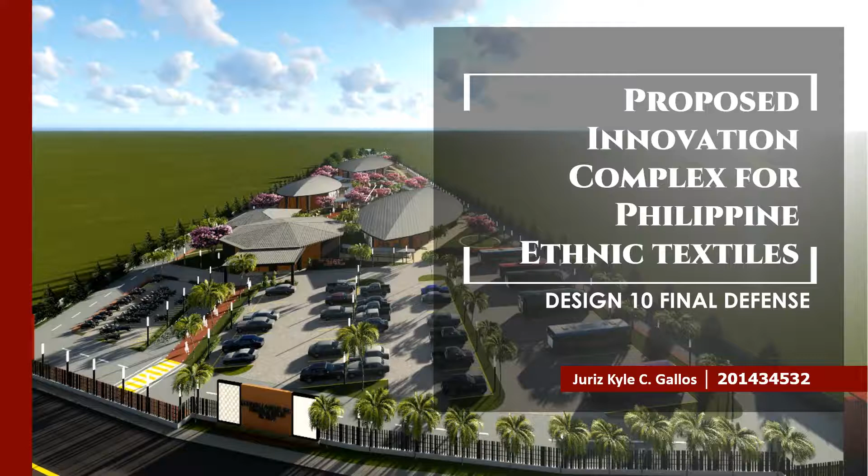Good day. I am Juriz Gallos, and today I will be discussing my thesis proposal entitled Proposed Innovation Complex for Philippine Ethnic Textiles.

Now, let's have a recap of what we have discussed in the previous presentations. At the beginning of the presentation, we discussed the significance of ethnic textiles and other relative information about it.

We also discussed the problems, issues, and concerns that the ethnic textile industry is facing. Upon gathering information and analyzing the situation, it was realized that three ethnic textiles from three different tribes are suitable to be part of the project proposal: the T'nalak from the T'boli tribe, Tabih from the Blaan tribe, and Inabal from the Bagobos.

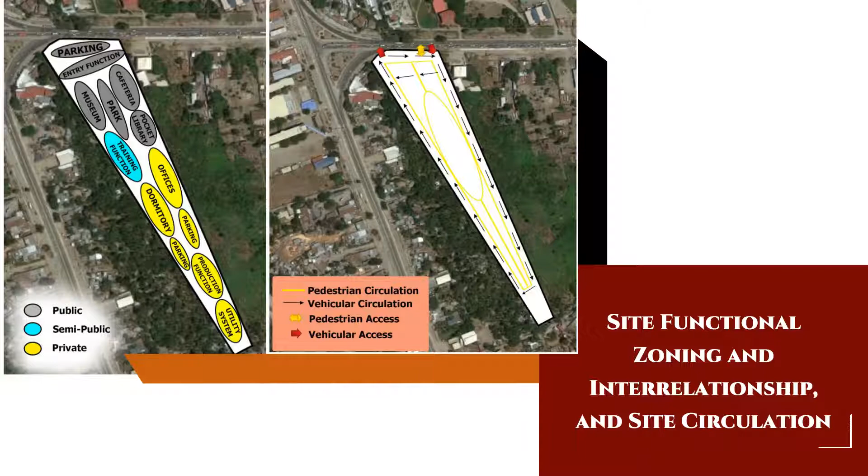Here in the slide, we can see the revised site functional zoning, interrelationship, and revised site circulation.

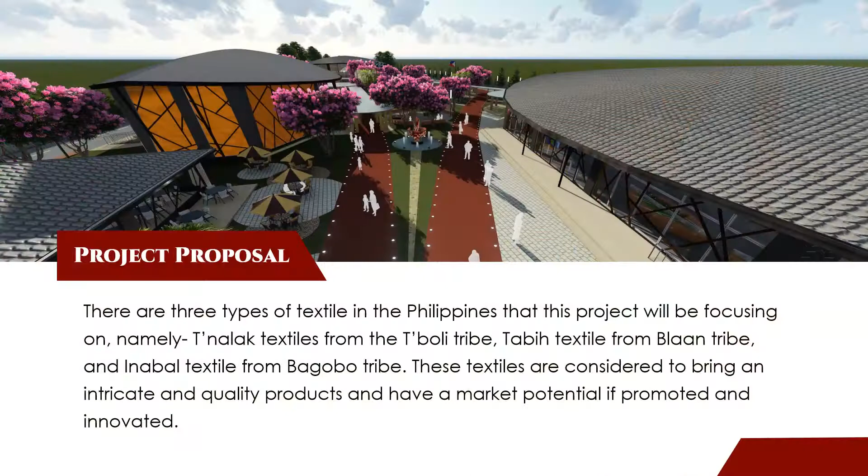Now we will move on to Chapter 5 of the thesis, which is the architectural design translation. In this phase of study, we will be converting all of the data and analysis that we have gathered from the research into architectural translation.

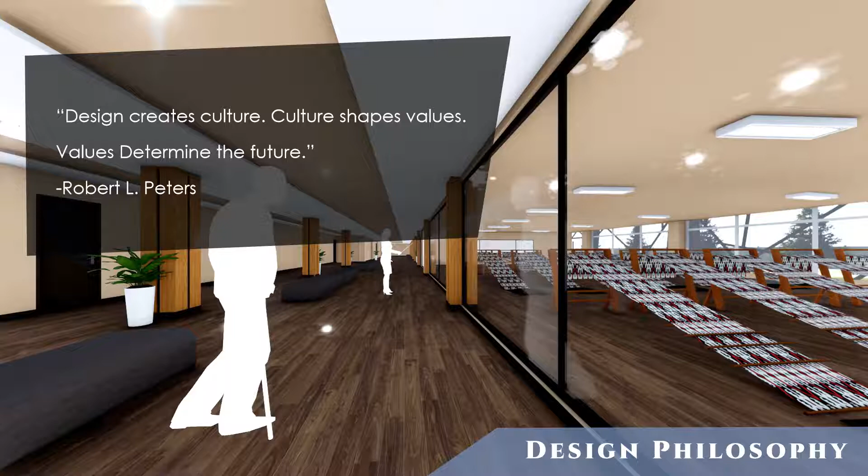And here's the design philosophy for this project. It is a quote by Robert L. Peters, which states that design creates culture, culture shapes values, values determine future.

The landscaping appearance complements the concept of a leaf. The landscaping is also functionally maximized by being useful as multi-purpose spaces such as park, plaza, picnic area, social areas, and more. The pathways are also designed to utilize pedestrian circulation in the most convenient way possible.

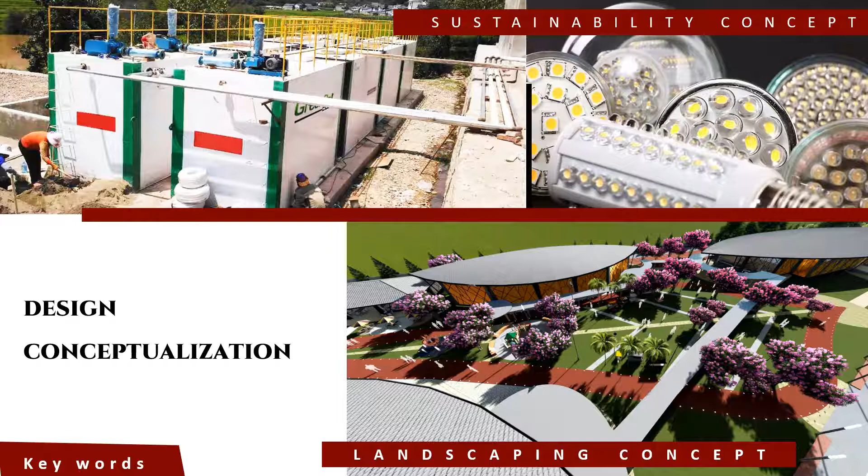Apart from this, materials and scheme to be used in the innovation complex will be earth colors and earth texture to emphasize the theme of indigeneity in the building.

Moreover, since the textiles are made with abaca fibers, which is potentially long-lasting, the textiles will be set as wallpaper in some of the accent walls in the building in order to introduce the ethnic textiles to every person who will be in that place.

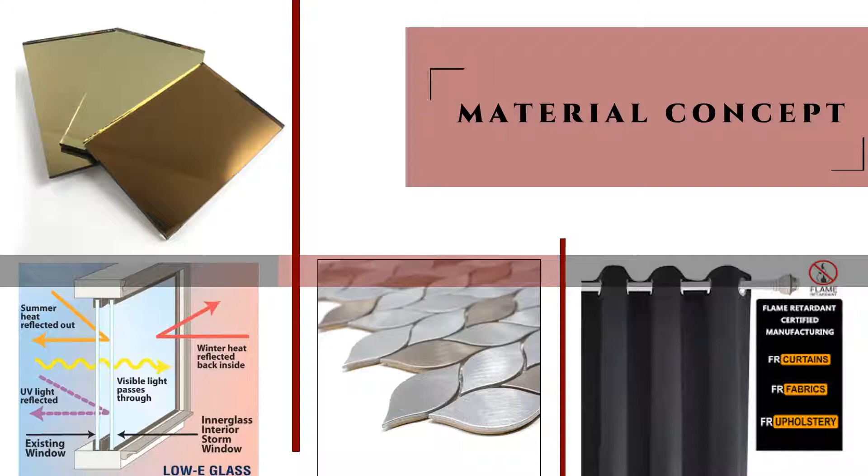Second is to bring spaces that will boost the tourism of this place. Third is to create a plan that will consider the architectural articulation of spaces that will bring convenience to its users. Fourth is to design buildings that will have a unifying and harmonious relationship and concept and will represent the advocacy of the project.

Fifth is to design an innovation complex that will serve its purpose and will answer the needs of its users.

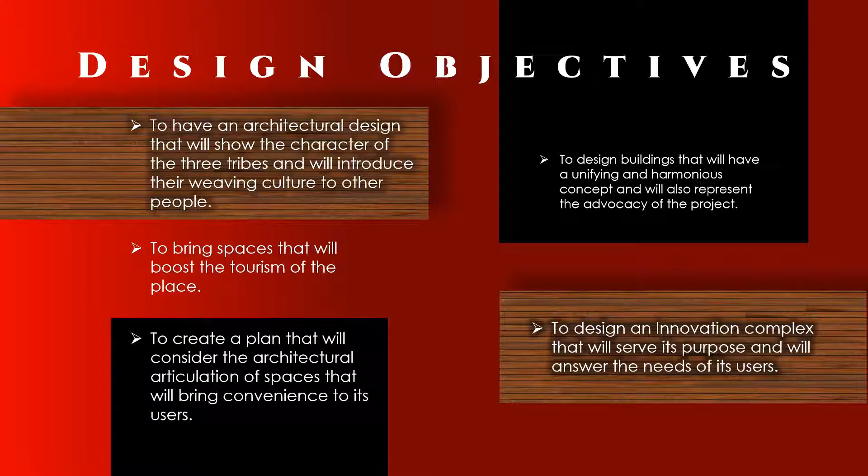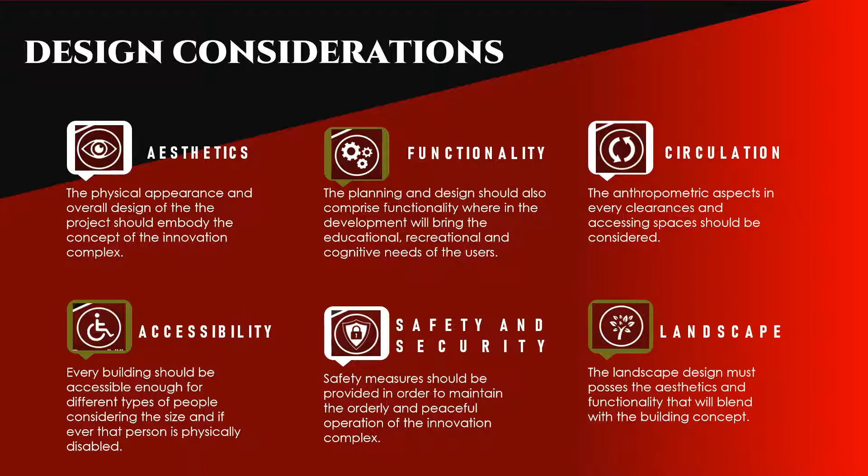The designation of buildings and spaces refer to the circulation of flow and behavioral analysis of every user.

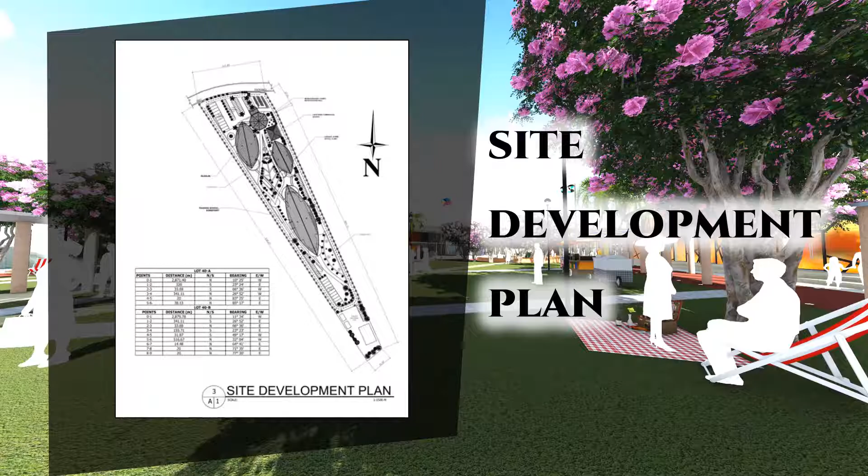Here are the perspectives of the site development plan. On the upper right of the slide, you can see the park, which also serves as a big opening and the biggest open space in the whole site.

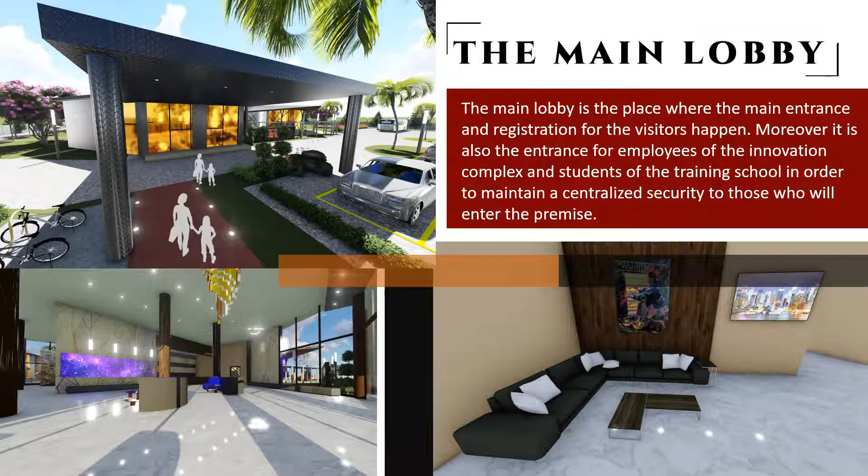Next, we will move on to the first building you will encounter when you enter the innovation complex, the main lobby. The main lobby is the place where the main entrance and registration for visitors happen. Moreover, it is also the entrance for employees of Innovation Complex and students of the training school in order to maintain centralized security to those who will enter the premise.

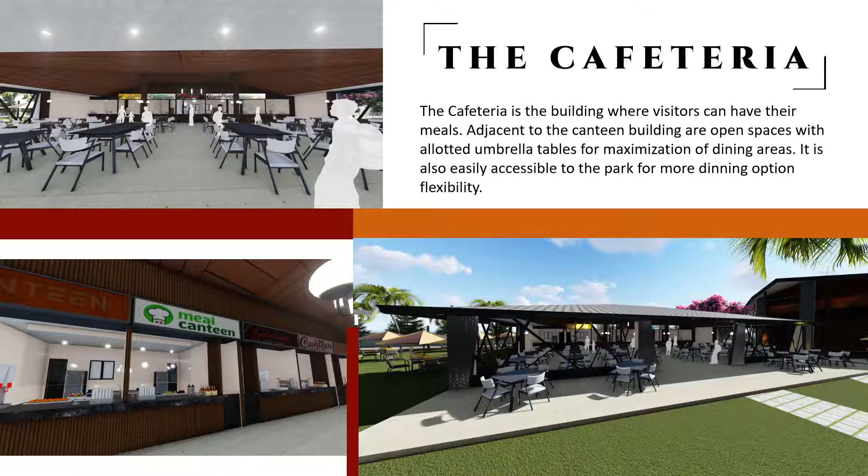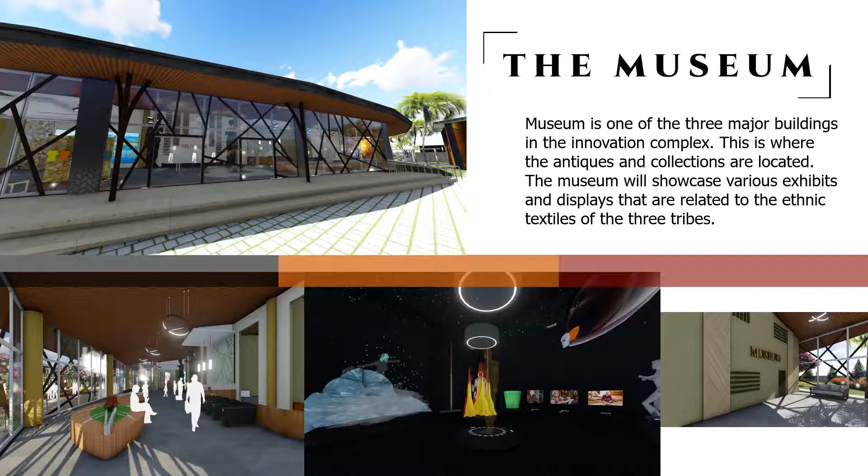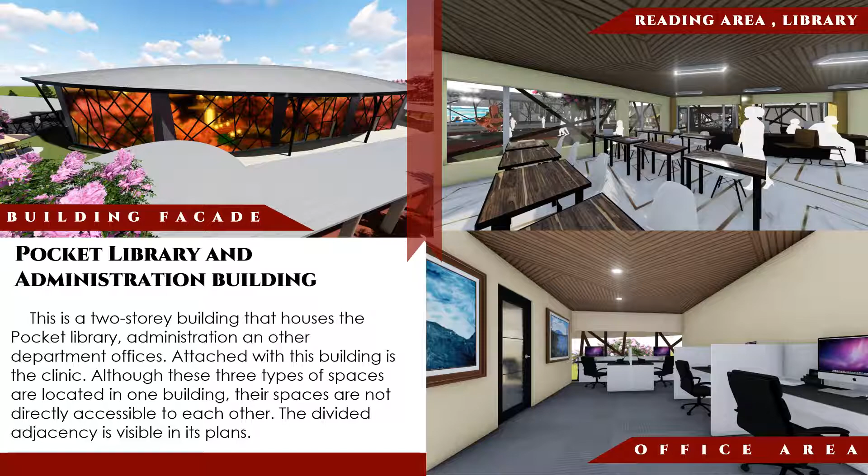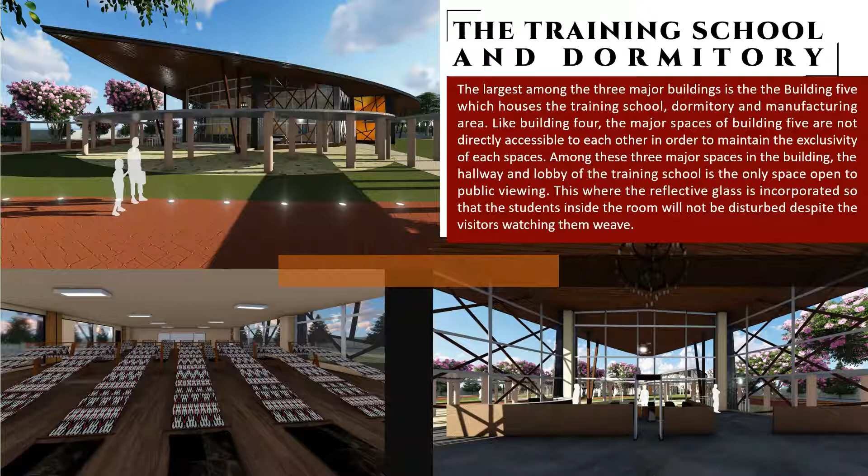Among the three major spaces in the building, the hallway and lobby of the training school are the only open space or the only space open to public viewing. This is where the reflective glass or two-way glass is incorporated so that the students inside the room will not be disturbed despite the visitors watching them weave.

Now, ending this study, we can conclude that the proposed innovation complex for Philippine ethnic textile is a project proposal that is studied in order to meet the project goals and objectives stated in the proposal. The concerns that the tribes are facing in relation to their ethnic textiles has been addressed by this project.

After this study, I have also formed recommendations for the future researchers who might want to consider projects related to this topic. Here are the recommendations.

First is having a further research regarding the present situation of Philippine ethnic textiles, and it is advisable and it must be determined by the experts of the field that may help improve the research.

Second is engineering translations and calculations made by experts of the field are recommended in order to develop the engineering design and construction of the project proposal itself.

The further study and analysis regarding the specifications, costing, and financial aspects are recommended for the improvement of the proposal. It is recommended to have an in-depth research regarding the ethnic textile weaving culture in order to improve the study.

And here ends my discussion for this project.